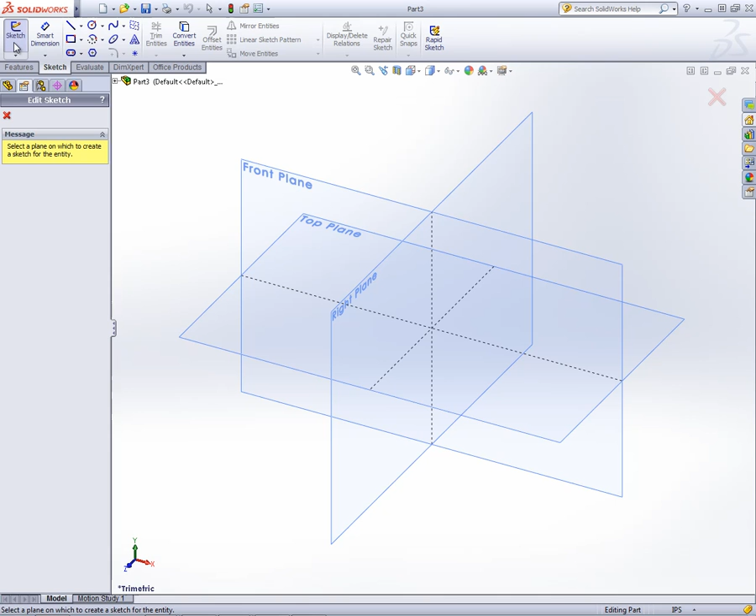We'll move our cursor to the front plane. When it becomes highlighted, we'll left click one time. Then we'll right click, and a pop-up menu will appear. We'll left click on Display Grid, and we'll start with a circle.

We'll left click on the circle command, move our cursor to the origin. Once the little orange dot appears, we'll left click one time and drag a circle out. We'll left click, right click, select.

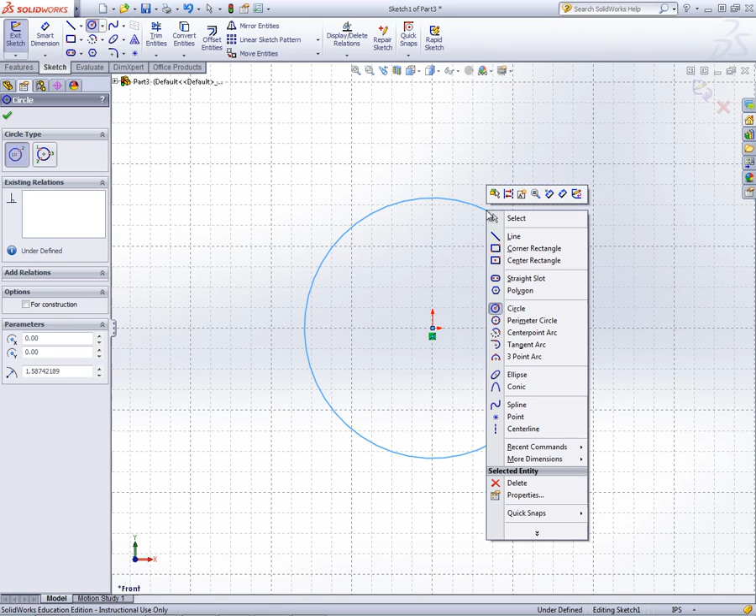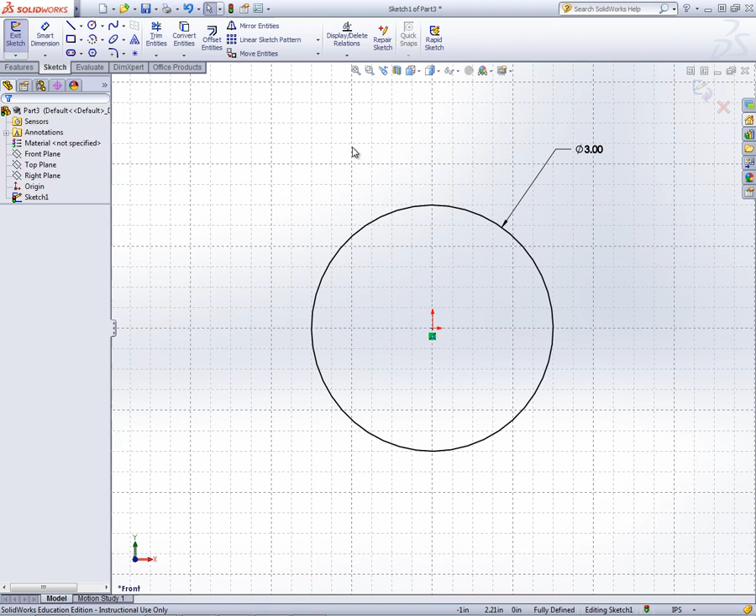We'll left click on Smart Dimension, left click on the edge of the circle, drag the dimension out, and enter a 3. Then we'll left click on the green check mark. Then we'll right click, left click on Exit Sketch.

We'll left click on the Features tab, left click on Extrude. We'll enter 0.25 for the extrusion thickness, and left click on the green check mark.

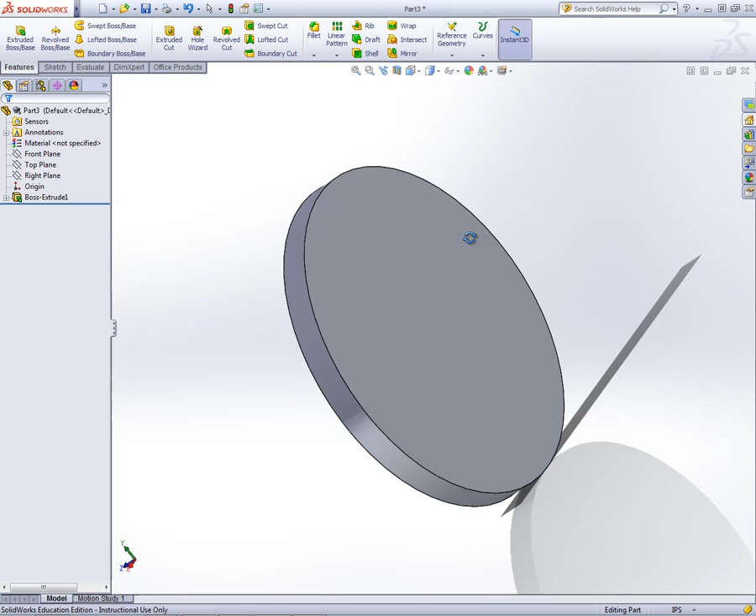We'll push the mouse wheel down and rotate the part around to gain access to the back side. Once the edges of that surface become highlighted, we'll right click, left click on Sketch.

We'll move our cursor to the circle command, left click on the circle command, left click on the origin again, and drag a circle out.

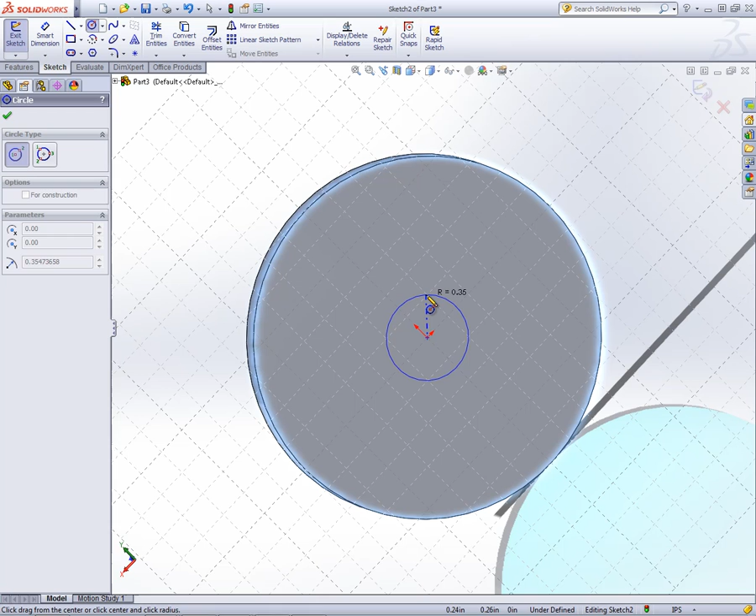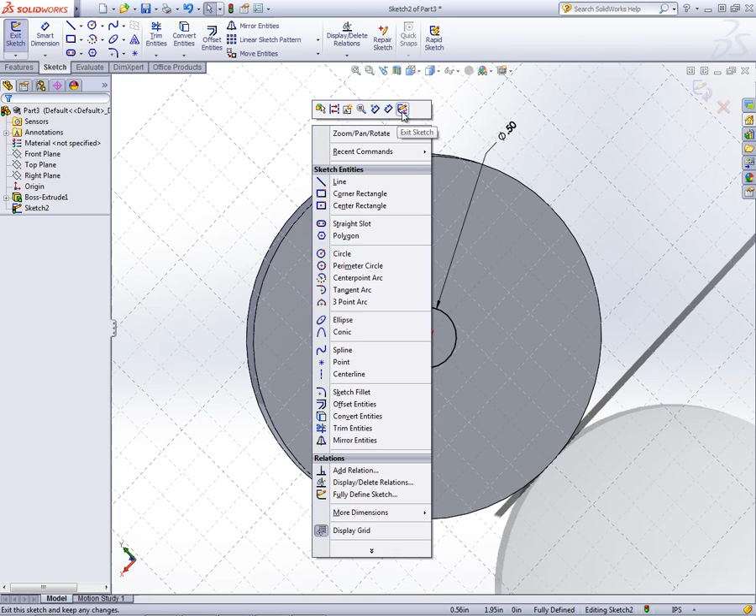We'll left click, right click, select, left click on Smart Dimension, left click on the edge of the circle, drag the dimension out, enter 0.5. Then right click, left click on Select, right click, left click on Exit Sketch. We'll left click on Extrude, enter 0.25 for the extrusion distance, and left click on the green check mark.

I'll left click out in the workspace, push down with the mouse wheel, and move the cursor around. We have access to the front side, and we'll put a sketch on this front plane.

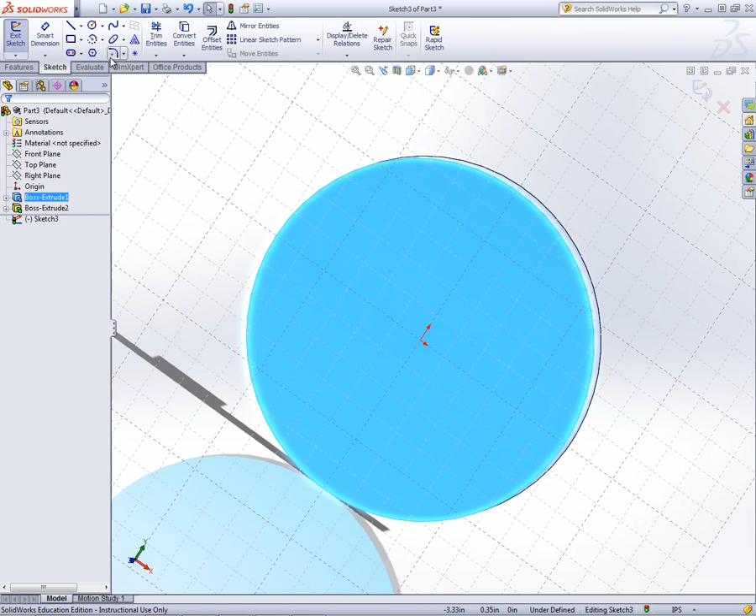Once the edges become highlighted, we'll right click, left click on Sketch, left click on the circle. It doesn't really matter where the circle appears.

Left click, right click, select, and we'll left click on Smart Dimension, left click on the circle, drag the dimension out, enter 0.5, and we'll hit the green check mark.

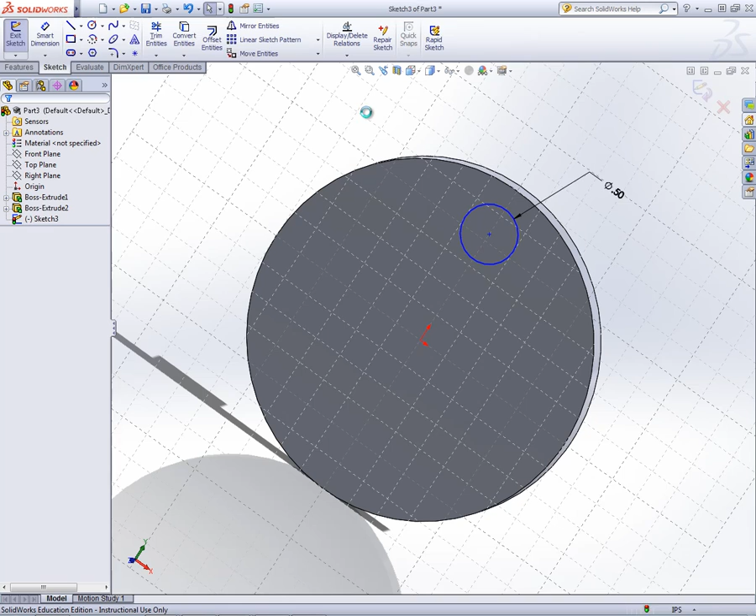Then we'll right click, left click on Exit Sketch, left click on Extrude, and we'll left click on the green check mark.

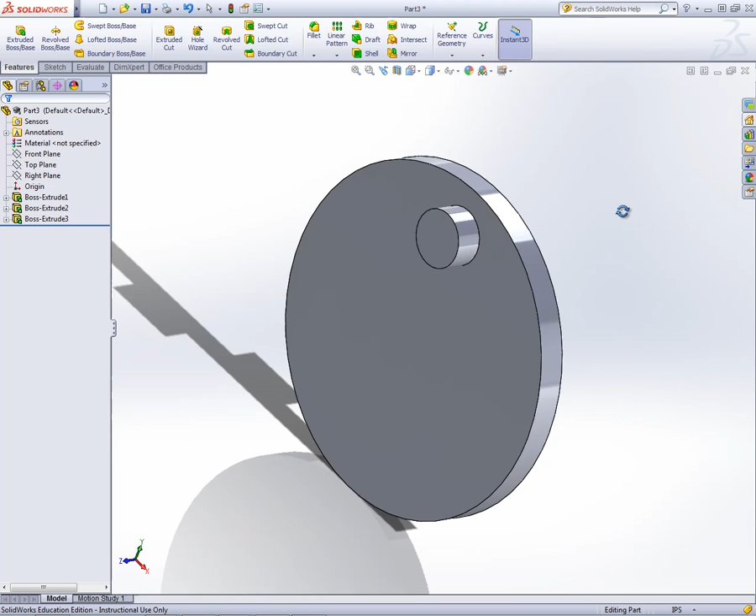We'll left click out in the workspace, and that concludes this module on creation of the crankshaft that will be used in an assembly in the future.